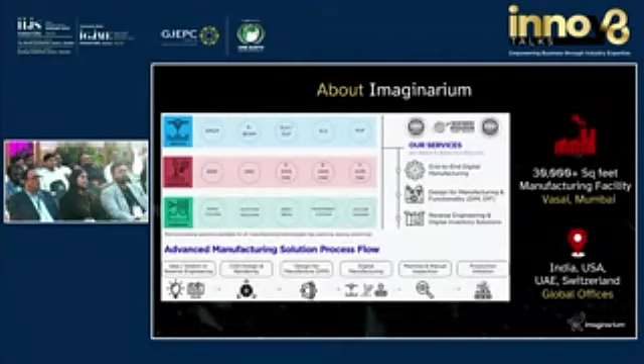These are the range of technologies which we offer, and you can see that we are AS9100D certified, which is a certification you need to produce airworthy parts. This means a lot of parts which we produce in our factory are already flying, either in fighter aircrafts like MiG-29, MiG-21 - I'll show a couple of examples later - or maybe in commercial aviation aircrafts as well.

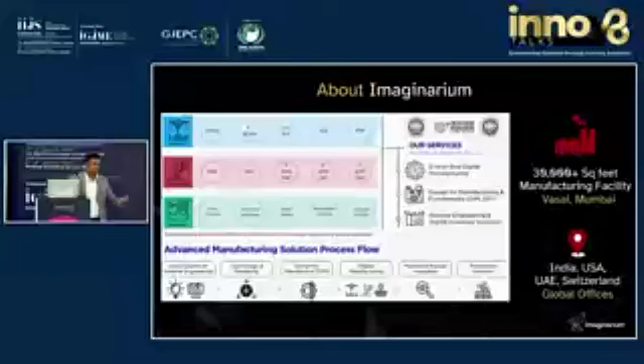We have a 39,999 square feet facility in Vasai, so all of you are welcome to visit if you want to experience 3D printing live. We've recently opened offices in Zurich and the US as well.

So what we did is we took the CT scan data, converted it into a 3D file, and printed this in titanium. Mind you, we had to make sure it's not super heavy, because otherwise it would have been difficult for the patient to carry. So we did some design optimization, and it's been 7 years now. The patient is running fine and continuously keeps thanking us. So this is the kind of impact we are making in the world.

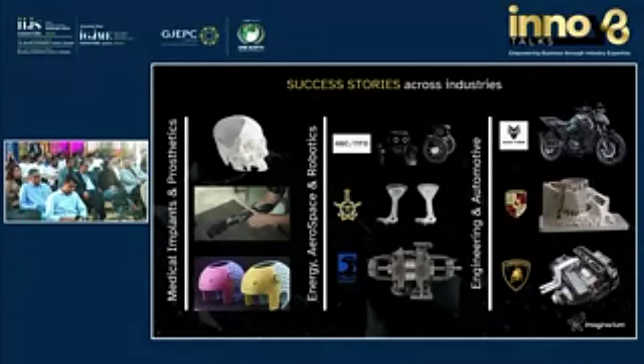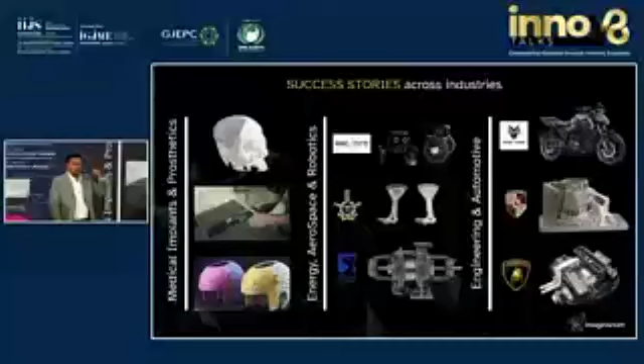Another case, let's talk about helmets. A lot of young children have issues with respect to their cranial lines. I have a 2.5-year-old son, and his cranial line is still visible. People who have C-section or suction deliveries don't have it as much, but normal deliveries show it more. So cranial helmets are used whenever there are cranial lines, because sometimes there's a chance of deformity. For this, we make a helmet specifically for the child.

So CT scan, design, custom print, and manufacture. These are the medical applications.

Let's focus on this one here. This is a door handle for a MiG-29 aircraft. During COVID, the supply chain was completely blocked. No parts were coming in or going out of India. But those aircraft have to be serviced — every 3,000 hours, the part has to be changed.

So the Indian Air Force and us, Imaginarium, collaborated and reverse engineered this part because they did not have any drawings, any CAD, nothing. They came to us saying, 'We have this broken part, can you make it?' So we reverse engineered the part, created the digital file, and 3D printed it in titanium.

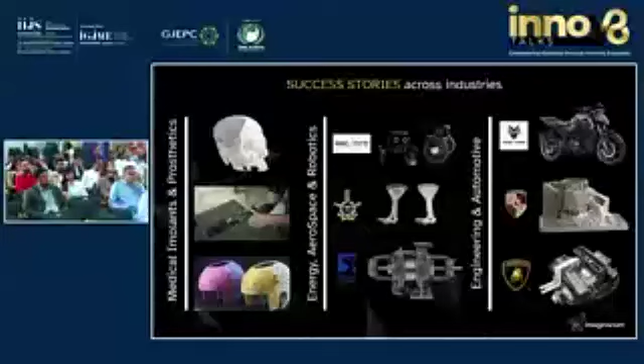Testing. In aerospace, testing is a huge pain because you can't just put any part on the plane. So we went through 3 months of rigorous testing with HAL, and now this part you see is flying right now on MiG-29 aircraft which you see in India.

This is for ADNOC. We have an office in UAE. We do a lot of work for Abu Dhabi National Oil Corporation. Can talk about it more.

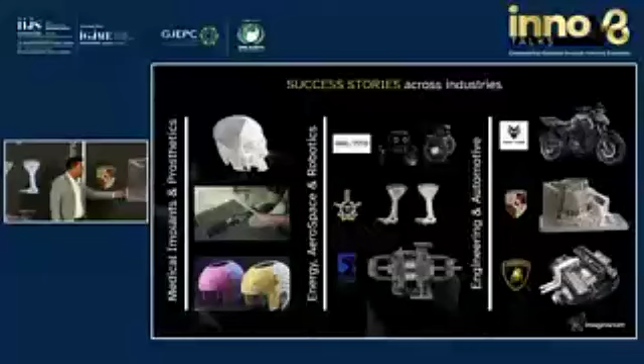This is for Porsche. I'm a big car buff, Porsche and Lamborghini. So Porsche came up with a problem that they wanted to reduce the weight on their part. This is a gearbox housing part, and earlier this was 8 parts.

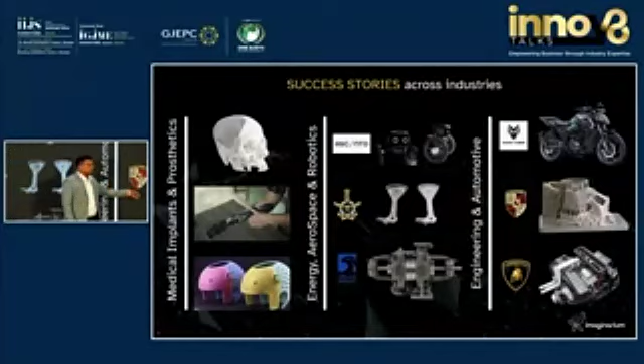Using our engineering — people say that in India, engineering doesn't happen, only manufacturing, or sweat shops, or IT services, or hospitality. So we at Imaginarium are every day trying to change that mindset. This part was completely engineered from 8 parts into 1 part, 40% lighter yet 20% stronger. And if you own a Porsche limited performance vehicle, this part is on there.

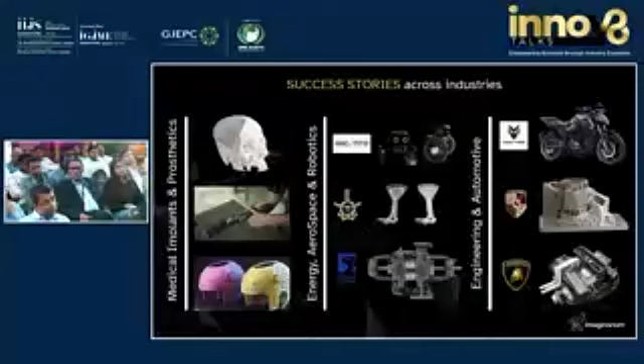Let's talk about jewelry, why we are here for. Jewelry 3D printing has been doing and will continue to keep doing wonders. Let me talk about this specific case. This is one of my favorite designers.

She's an Austrian designer called Marie Boltenstern. Usually if you want to make this, you'd have to make it in different pieces, solder and weld them together. But this entire piece has been printed in a single piece. Also, the beads inside are not added afterward — the machine was stopped in between, beads were added, and then it continued printing the part. So it's truly a single piece design.

We'll talk about this entire bracelet — it's made entirely as a single piece.

With 3D printing, and of course, I'm going to talk about more examples.

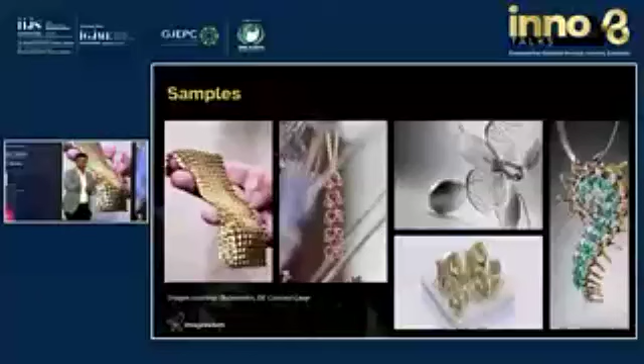So let's talk about what's happening right now, what's happening currently, and what we're trying to change. By 'we' I mean this is a joint project between CFC and Imaginarium. Mr. Ravi is here, who's the CEO at CFC. We did a lot of brainstorming and within one year we were able to execute this project.

I've never seen this kind of speed in government projects. Ravi bhai, I hope it's okay to say that. So currently, and that's why I carefully used this word yesterday, what we are doing is: there's a 3D model, and either we are printing wax or plastic, casting, master, rubber mold, wax, etc. I think all of us are familiar with this process.

But this is what we feel is already today and the tomorrow. Where you go to a factory, imagine the size of your factory from 2 floors, 3 floors, and so many departments, reduced to only 3 steps: design, direct digital to metal print, and then finishing and polishing.

So today, as factory owners - I'm a factory owner myself in my current role - you deal with issues like salary not coming on time, someone going on leave, someone's wedding, someone's mother, all those problems as factory owners. Imagine for a minute that none of those problems exist. There's a concept called lights-out factory.

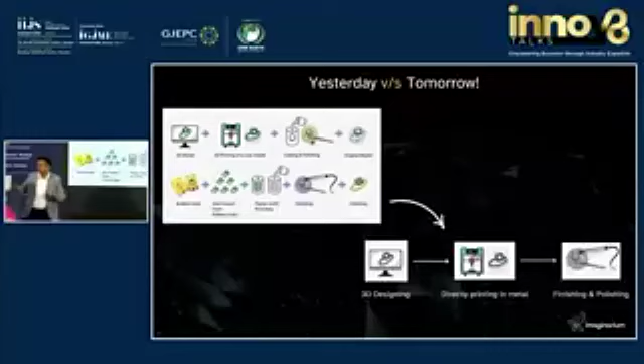But that advantage can sometimes become your disadvantage because you can't scale up. Of course, a lot of companies have scaled up, but imagine today you can actually run your factory in just 3 departments, 3 steps. This also challenges the retailers - if there are only 3 departments, why not have the factory at the retail point of sale at all? It's an open thought. I'm not sure how much the manufacturers here will appreciate this thought versus criticize it.

But that's the vision. Boltenstern has done exactly that, where a customer comes in, designs or co-designs the part with the retailer. After a couple of hours, they go see a movie or whatever, they come back - it's on 5th Avenue - and 5 hours later they take their jewelry back. So this is the dream.

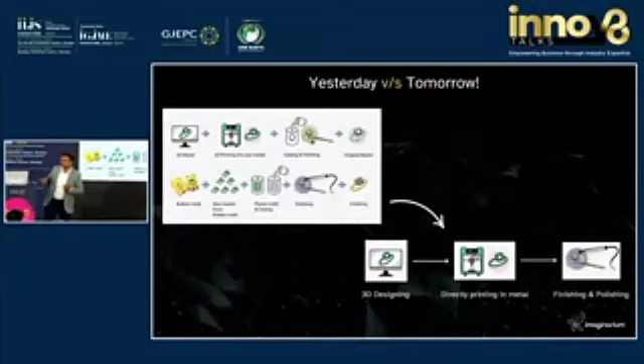So we talk about CFC, and maybe this video will give you two pieces of information. One is what CFC is and what they are doing. Second is an in-depth know-how into the process - okay, how does metal 3D printing happen? It's not magic. For me it is, but I hope it's not rocket science for you, or maybe it is the other way around.

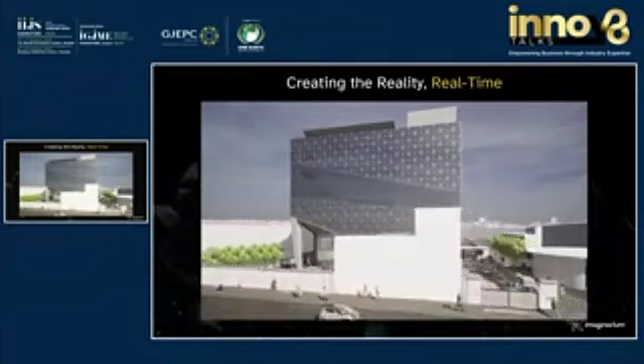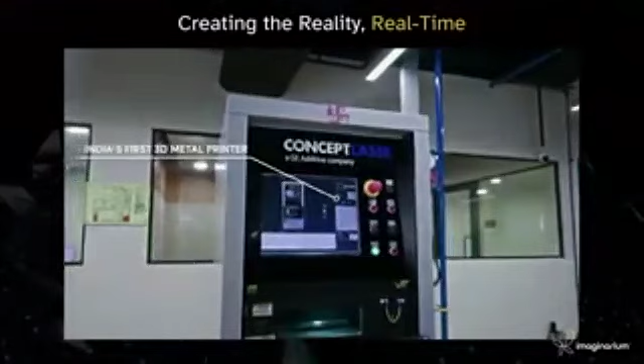Welcome to Bharat Ratnam Mega CFC, India's first revolutionary state-of-the-art facilitation center designed for the jewelry industry, enabling the vision of an Atmanirbhar Bharat. Bharat Ratnam Mega CFC proudly stands as the home of India's first 3D metal printer for the jewelry manufacturing sector. We specialize in 3D printing with titanium, gold and platinum, ensuring precision and artistry in every piece created. CAD files, the blueprint of each creation, is where it all starts.

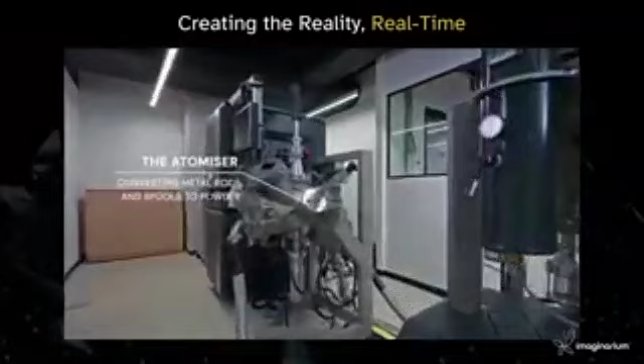Skilled designers meticulously plan and craft each detail, ensuring precision and excellence. The printing process begins with atomization, with solid metal converted into fine atomized powder. The control panel is the nerve center of the atomization process. Its intuitive interface manages and monitors each unit for seamless, precisely controlled operation.

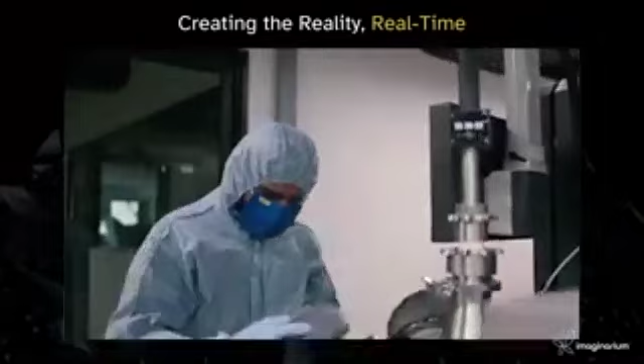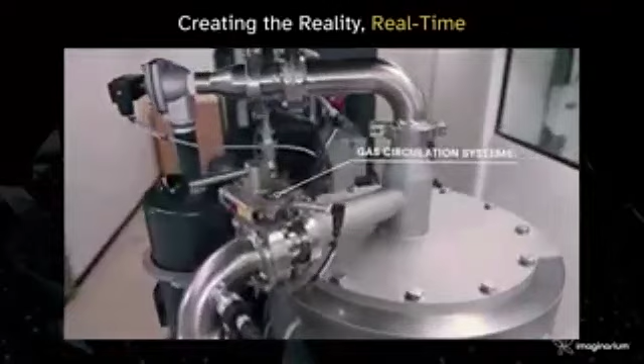Here, a plasma beam precisely melts and breaks the metal spools or rods down to create high-quality atomized powder. The machine's gas circulation system maintains a secure and stable environment, critical in ensuring operational integrity and safety during this process. The atomized powder is then collected into this container.

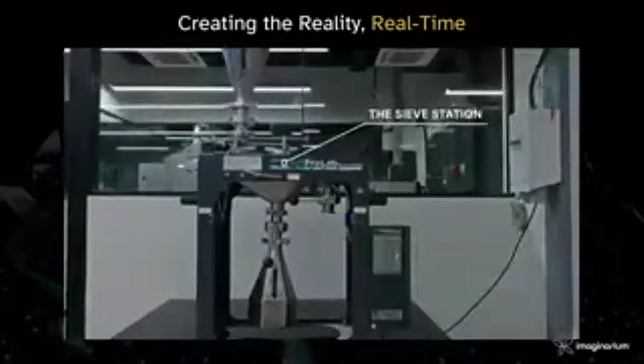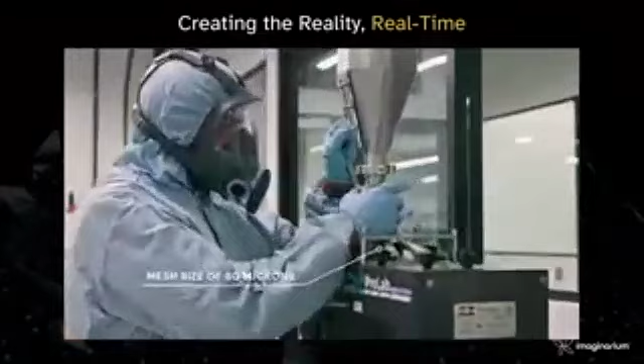Just before printing, the atomized powder needs to be filtered. The sieving station, using advanced ultrasound technology and a mesh size of 60 microns, maintains fine powder consistency. The refined powder is then carefully loaded into the metal 3D printer.

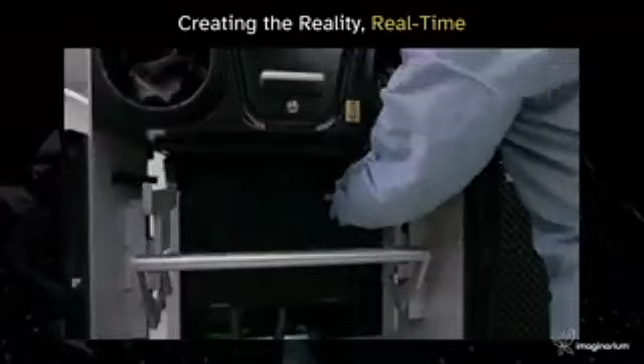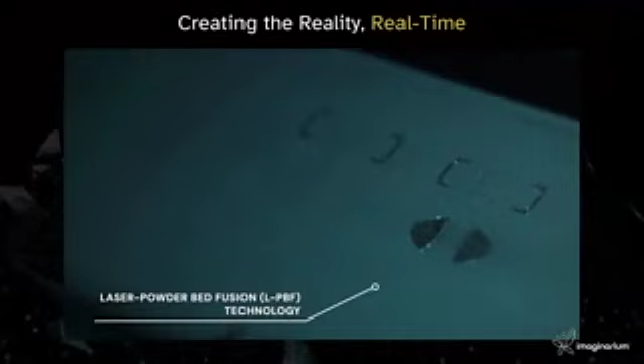The print process is now ready to commence. At the core of this operation is laser powder bed fusion (LPBF) technology, which meticulously builds designs layer by layer, delivering exceptional accuracy and detail.

Once printing is complete, the build undergoes depowdering, unveiling the initial form of the final product.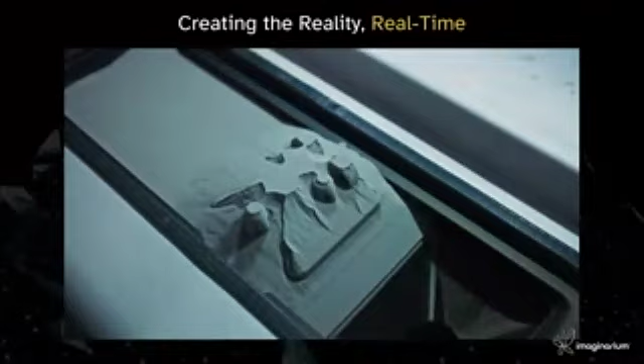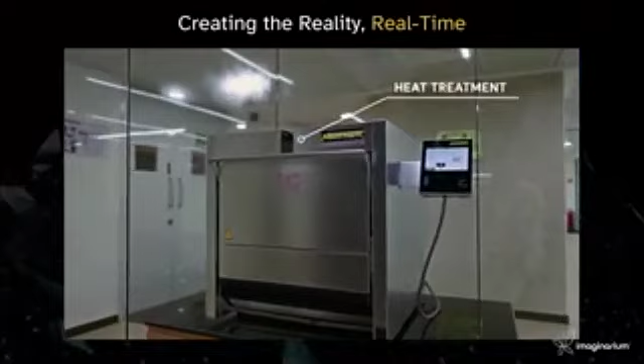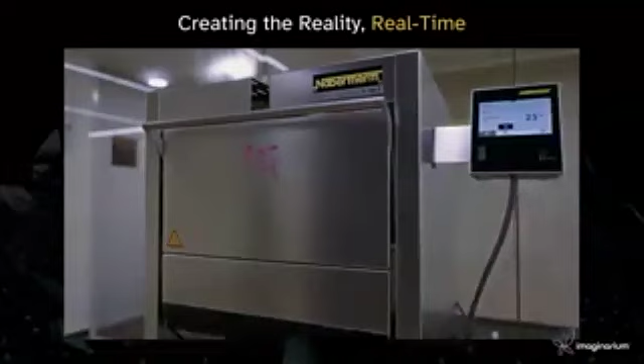The parts are then subjected to heat treatment in a specialized furnace to eliminate residual stresses and enhance material properties and durability of the final product. This step, while not required for all parts, reinforces product quality to exceptionally higher standards.

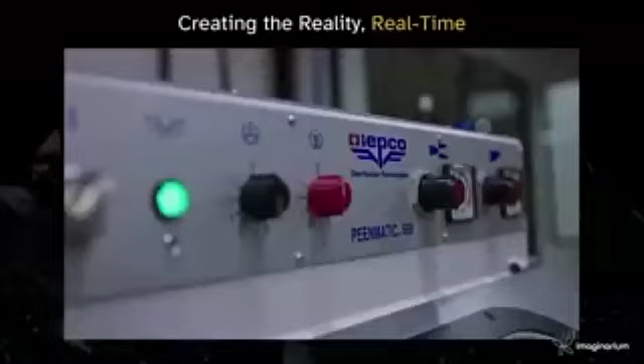Next, the surface finish is refined using a micro sand blaster, ensuring a smooth, uniform texture and perfecting the parts for the final stages of production. From a rough, powdery start, the journey culminates with an intricate, polished finish.

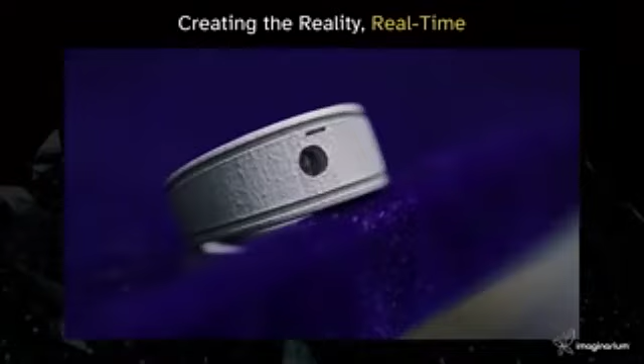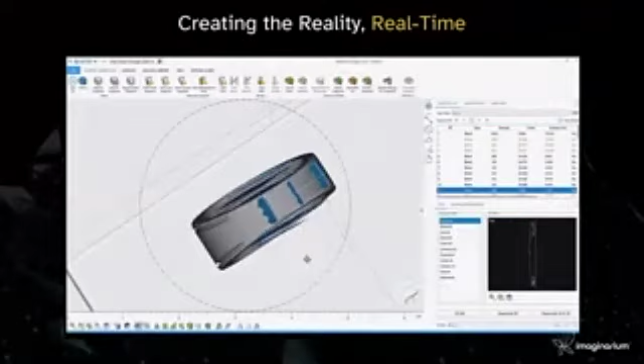Each piece exemplifies Mega CFC's hallmark precision and craftsmanship. At Bharat Ratnam Mega CFC, we are not just manufacturing jewelry, we are redefining the future of jewelry design and manufacturing, aligning Indian standards with global benchmarks in quality and technology. This is where innovation transforms creative vision into reality.

Mega CFC, setting the stage for the confluence of tradition and innovation.

So I hope that video gives you an insight into the step by step process. As you saw, it's not only like CAD, 3DP where design comes in and 3D printing happens—there's an ecosystem which runs behind it. What Imaginarium and Mega CFC have done together is stabilize our ecosystem. I won't say it's a fully commercial project or a fully research project—it's somewhere in between, where we are taking one step at a time and achieving milestones as we go.

So talking about milestones, just look at the timeline. That's why I said we're not used to working at such speed with government, semi-government entities. But the foundation of Mega CFC happened in 2024.

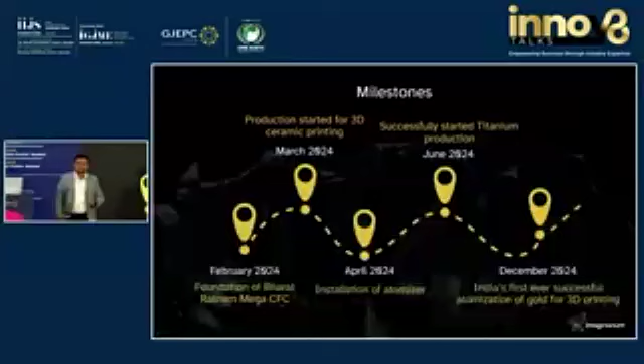In March 2024, we started India's first ceramic 3D printing. I know of two companies who actually started their brand only based on this, because ceramic is a hot topic right now everywhere. Earlier, just printing the ceramic was not an option because you have to then debind it and sinter it—so you need a lot of engineering expertise, and that's where we come in.

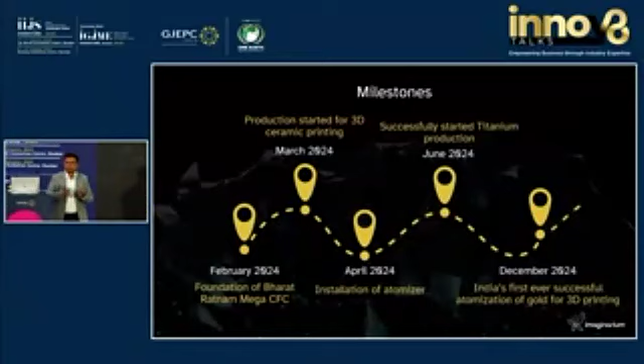As we speak right now, we have a ceramic 3D printer live running at CFC. Again, open invitation to anyone who wants to experience or just get a sample part as well.

Second, the biggest problem we had—metal 3D printing in jewelry has been around for a while, right? But the biggest problem was every time we needed to do gold, we had to import powder from outside, which means duties, shipping, taxation. This same presentation on this same topic I did six years ago in Coimbatore at Emerald, right? And from there to now, one thing which has changed is our powder import dependency is not there anymore.

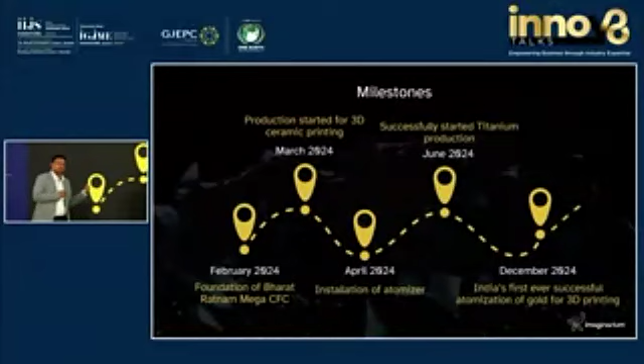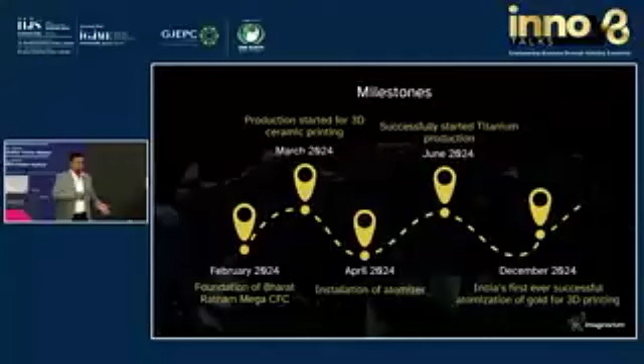We have installed India's first atomizer. An atomizer, as you saw in the video, is a machine which produces powder. If you put in any form of metal—jewelry scrap, wire, anything—the concept is that if you put in any metal, you'll get a powder, and powder is the raw material required for the 3D printer. So now that we are able to make it ourselves, we are truly making all the constituent elements in India at Andheri. There's no requirement to go anywhere outside.

I can say in June 2024 we started production of titanium jewelry. So whatever parts you see right now with Sudev and the team is all titanium jewelry. The same kind of finish and accuracy we will be able to see in gold as well. Gold was not ready yet till day before yesterday, right?

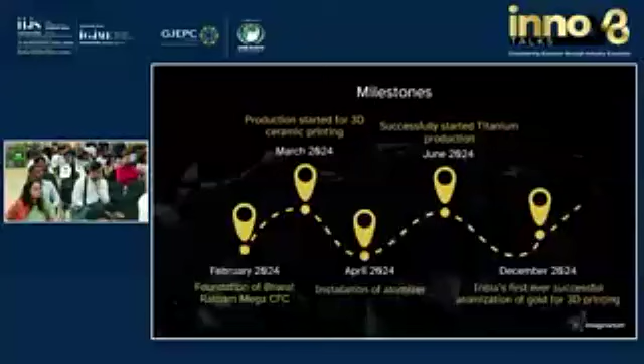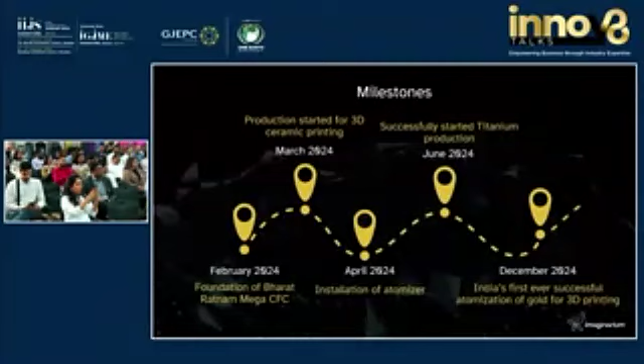Where we produced our first gold powder batch, atomized gold powder batch. Again, it's a research and development project—it's not like we make gold powder today and install it in a 3D printer tomorrow. It takes time, takes a lot of metallurgical engineering design, and we are working on that topic right now as we speak, right? But you can see the progress we've made in the last couple of months.

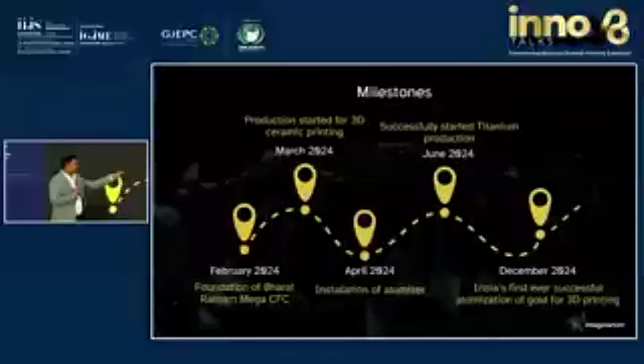From nothing at all in India to now having a working parameter, working machine, working atomizer—and the dotted line doesn't end because we have many more milestones to cross. Along with Ravi Bhai and Imaginarium, we have many more milestones to cross, and we are looking for partners, which is a good segue into my next slide.

Before that, what we feel is that our vision for this project is to enable a sustainable lights-out factory for jewelry.

How many of us have heard about this concept called lights-out? Has anyone heard of a lights-out factory? Great. So a lights-out factory means whether you're there or not in the factory, when the lights are not on, the factory is still running, right? That is how we are envisioning together the future of jewelry production—whether it's Saturday, Sunday, Ganpati, Diwali, Dashera, whatever it is, the factory or the machine will keep running. That's what we are pushing for, and that's the goal.

As I mentioned, there were a couple of challenges. First was raw material availability - material imported from outside, import duty, and we didn't even know what code to tell GJEPC because we never imported gold powder. It's usually just raw material in the form of a solid bar. So the solution was to atomize and make your own.

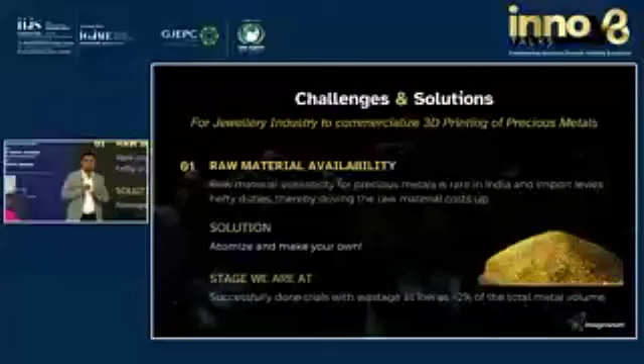With CFC, we were able to bring that dream into reality. The trials we did last week achieved powder with wastage as low as 2% - actually 1.7%, but when I speak to jewelers I'm careful, because they catch onto numbers and ask why it changed. So manufacturing taught us to be cautious, so we say 2%.

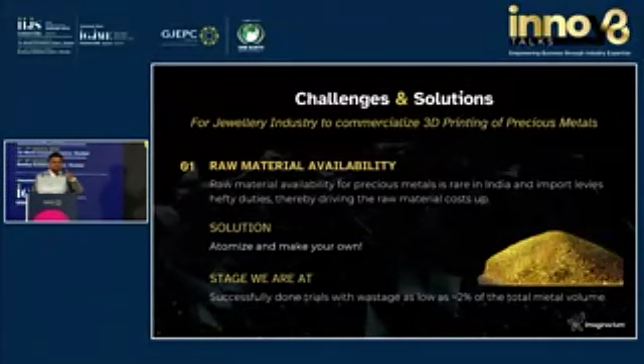With low wastage we were able to do the trials for atomization. Second, and this is the biggest call to action in front of us right now, is designing for this technology. There cannot be a situation where you've designed something for casting, chain making, or CNC, and expect that same part to work as a business case if done in 3D printing. There's very little chance of that happening - it will be very difficult.

So what we focus on is a concept called design for additive manufacturing, where we are literally and figuratively breaking the mold - the silicone mold we normally make, we are literally breaking that. Whatever design principles existed all these years - keeping the shank at a certain thickness, the prong at a certain thickness and distance - all has to be revisited specifically for this technology.

Sudev and the team at CFC R&D have done an excellent job. We have made a design guide for anyone who wants to design for this technology, and we will publish this soon on the Mega CFC website. It's an open document - we don't want to keep anything to ourselves. Give it to your CAD designer, and I'm sure we'll come out with something good. Maybe this is too early, Ravi Bhai, but we're also thinking, and happy to engage with you all.

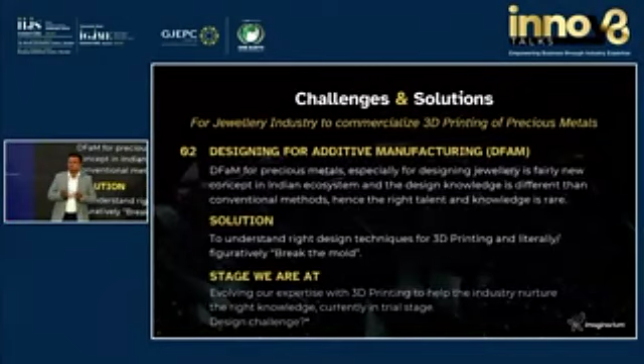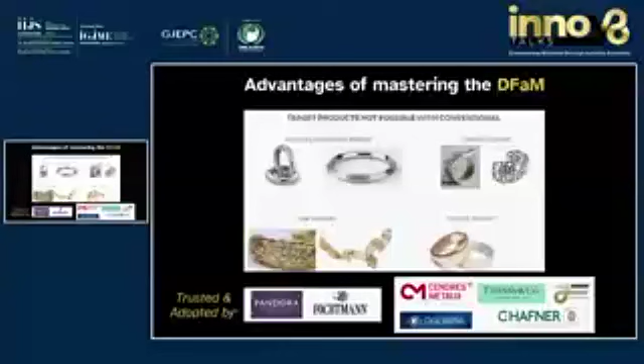We are also thinking about a design competition, where we could invite designers from GIA or the industry to design parts for this technology. I'll show you how those parts look. There are 4 basic segments where people are already using this technology: hollow lightweight, complex, linking, and custom.

This isn't something new I'm saying - it's available on Google, ChatGPT, whatever your favorite search tool is. The companies mentioned here are already doing it. I did an internship at Penn State with someone who worked at Tiffany - they already had 4 machines, this was 4 years back before COVID. Metals like platinum and titanium, which are difficult to cast, are no-brainers for this technology.

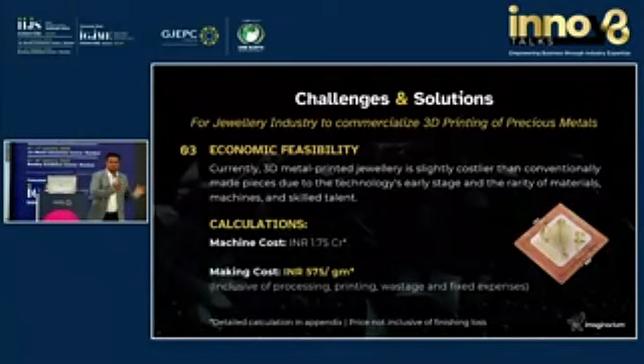I have a detailed calculation for all the Excel wizards here, in the appendix, showing how we reached that number.

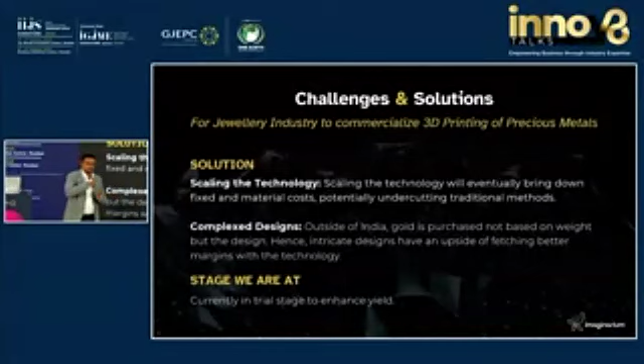What we are also working on is improving the loss ratio, because the loss-saving techniques are made for casting and CNC. We are working with post-processing experts to design equipment that saves gold loss in the machine, in atomization, and even in the post-processing stage.

So these are the two asks which we have, which I have, which Ravi sir has, to the industry. One is gathering gold powder - we really struggled because nobody was ready to give their gold for this, since it's a trial, R&D based effort. So if anybody wants to be part of the consortium or this partnership to try it out, please come forward.

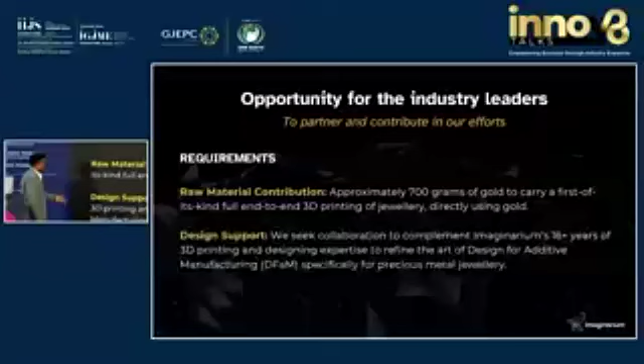The second and most important ask - though this isn't as important - is design support. We need people to think outside the mold, literally and figuratively here.

We need designers who have seen some idea or concept somewhere, but your current CAD designer says 'how will this even be made?' - where the manufacturer or designer restricts your creativity. This is an amazing tool for you to explore, because what you see in CAD and what you get in hand still has some difference.

I'll show you a nice sample which we have - it's of some guru in Karnataka. You can even see the teeth, the tiny crevices of the teeth, we printed that too, and it shows. That is the kind of precision we can achieve.

Also, full disclosure, we've done trials with micro pave settings as well. We are still optimizing - in micro pave, the prongs still come out joined together. Full disclosure, please, don't tell me later that I didn't mention this precision issue. But we are working on that.

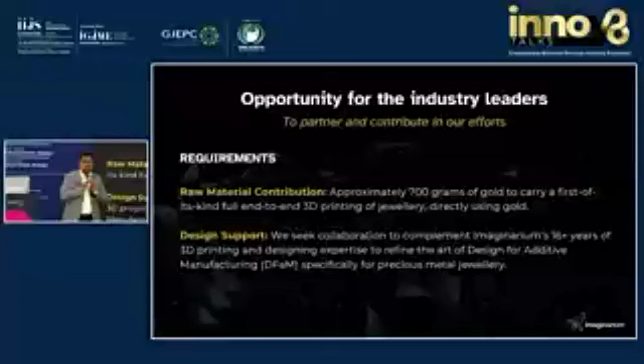That's why I'm saying you have to design for this technology. You can't use casting principles and say 'just make the same thing in 3D printing' - that won't work.

And what do we assure you in return? Early access to R&D, right? You get to contribute and access, at the same time, the next big thing in the jewelry industry at - more importantly, underline bold - almost no cost.

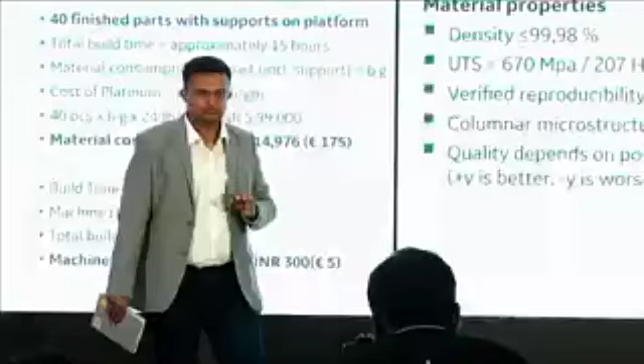And that is why I keep saying you have to design for this technology. Some people love that grainy finish, they want that grainy finish in jewelry. For that, people do additional post-processing. Like linking jewelry, which I have here as a sample — they say I have two options: I make 10 parts and solder them, spending that much time, or I make it as one part and spend more time on post-processing and equipment.

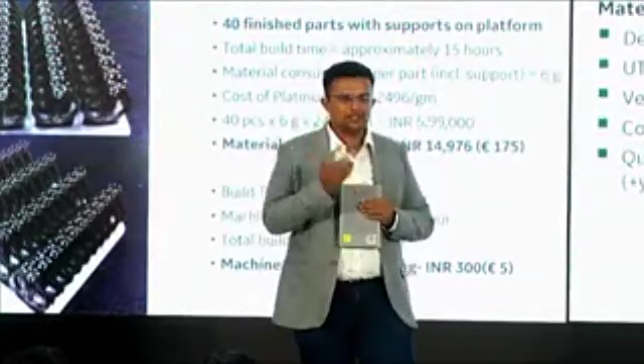Currently, the challenge we're also facing is that the kind of tools available in the market to finish these parts aren't there. So again, we have to work with outside vendors, like importing those tools. I got in touch with the best of the best tool guys here, and they say, who finishes something this hard? As with titanium, people aren't used to finishing titanium — but us, in the aerospace industry, we do.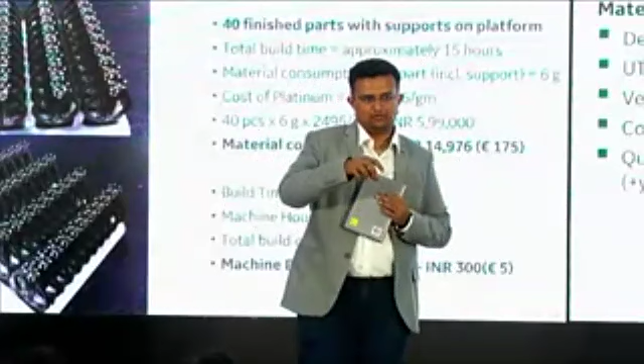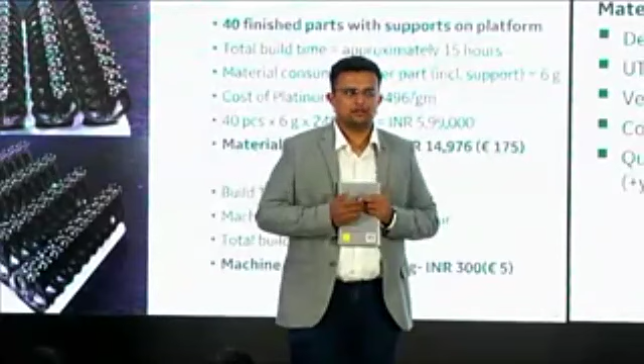But again, those tools are very crude. We print large parts, we don't need this kind of resolution. So that's a challenge. We are exploring electropolishing, automatic deburring machines, and a process called HIPing, hot isostatic pressing, which is a heat treatment that improves the porosity value. I'd be lying if I said 3D printed products have no porosity - they have porosity, but that's what we have to work towards.

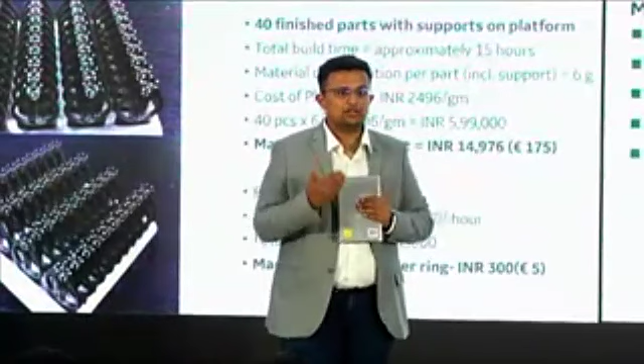I was saying, when you mentioned we polished an implant to such high glossiness that you can see your face in it - that tool I have available for industrial use.